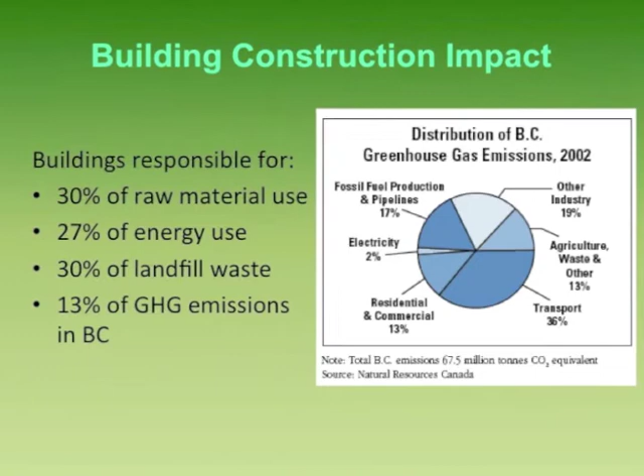So what's the impact of building on the environment? Buildings actually do have a huge impact. The guy from the city was saying that he was finding the biggest demand in energy was for their existing buildings. So 30% of raw materials go into buildings, 27% of energy use, 30% of landfill. Now, when there's a boom, that actually goes up in numbers, and that's including all new construction and renovations, and 13% of greenhouse gas emissions in BC. So it's a pretty huge impact.

So what is green building? Well, it's part of a solution. There are lots of different ideas to try to address the problems of greenhouse gas and global warming, but certainly farming is one, and I'm involved with that issue also. So to create a green building, we select durable materials, and the first thing I put up there is wood, because it's my favorite material to work with, being a carpenter, but there are other solutions out there, and cedar is one of the best ones.

We also have to consider the embodied energy in the building. This comes right from where the materials come from, the transportation of those materials to the site, and how those materials are used on site. So there's a life cycle of a material. I liked the presentation from that young man who was talking about reusing existing wood that would be thrown away.

One big principle of green building is to reduce thermal bridging. I teach building science, so what is thermal bridging? Basically, it's the transfer of heat through a wall from studs. This is a thermal image you would take with a thermal camera, and it's showing where the heat loss is in a house. So basically where all the studs are is where you lose some of your heat. Of course, most of the heat is lost through windows, but this gives you an idea of where the heat loss is in the house.

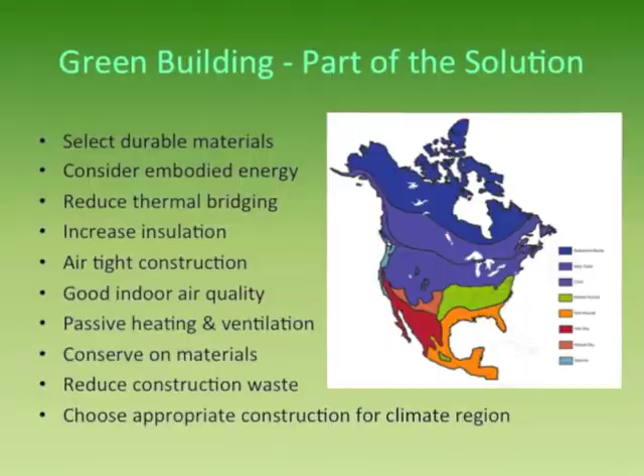But Vancouver Island actually shares two hygrothermal regions in North America. So we're actually a part of a marine climate and a cold climate similar to what's in central United States. But our building codes throughout the rest of Canada are for a very cold building climate. We share the same uniform building codes across Canada, so we end up with some issues with that. So we try to create regional requirements for our building codes.

And one of those is vapor barriers and ventilation. The rain screen was one of those issues. So the big point here is to design a house and build a house that's appropriate for your region. So I don't want to make too long a presentation here.

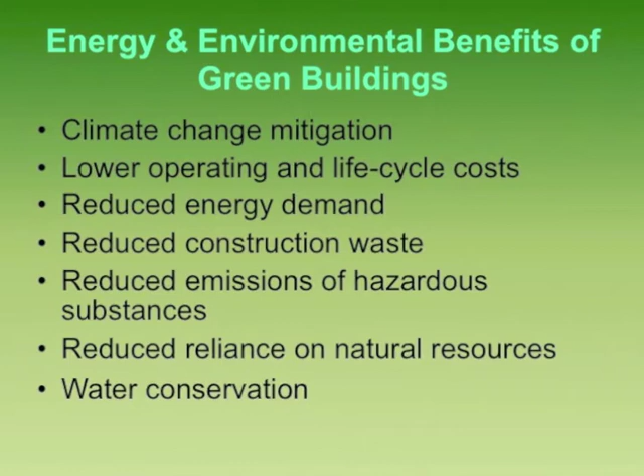The advantages of green building would be to mitigate climate change, to lower operating and life cycle costs, to reduce energy demand, reduce construction waste, reduce emissions of hazardous substances, reduce reliance on natural resources, and water conservation. This is all possible. This is being done, and there are a lot of ways of doing it.

A good example: CMHC sponsored a program called the Equilibrium Program, at the bottom of the screen there. And this example here is in Edmonton, Alberta. I like this example because this contractor is one of the best contractors, in my opinion, in Canada for building net zero buildings. What is a net zero building? Basically a building that

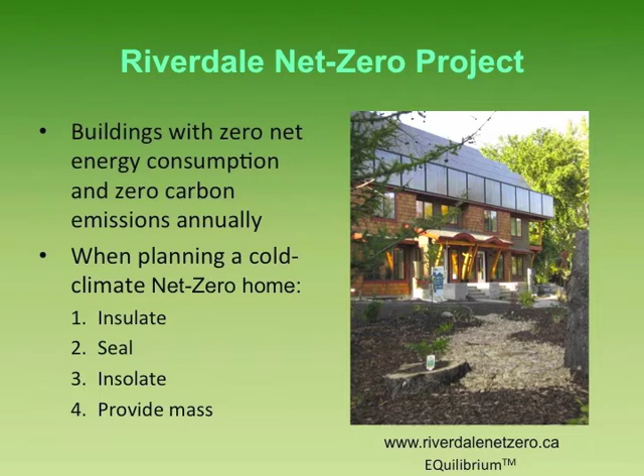has net zero energy consumption, and it does that by actually creating energy with photovoltaic systems. Also, with consideration of all the materials, you consider the carbon emissions annually, and that should be net zero too. And how we do that in a cold climate is we increase the insulation, we seal it, make it airtight, and we insolate, which means thermal design for solar thermal, and provide thermal mass.

So in this example here, why I like this one is that it shows you the actual dollars and cents. I get this kind of question all the time: how much does it cost? Is it going to increase the cost of my construction quite a lot? Well, I usually have a set answer: maybe about $5,000 or $6,000. Most people are pretty shocked that in a new construction it could come that cheap.

So basically, it's just a different philosophy in construction. We're looking at increasing the wall thickness and adding a little bit more insulation. So in this example of the net zero home, it actually cost $109,000 to achieve net zero energy. That was to provide the photovoltaics and the hot water heating system, but only $18,000 of that $109,000 actually created 85% of that energy conservation.

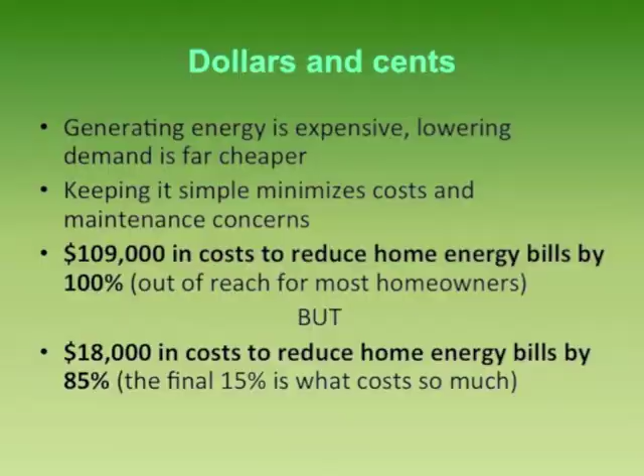So let's break it down and look at what happened. Out of the $18,000, we're looking at better insulation, windows, heating systems that are more efficient, appliances, and passive solar design, for a total of $18,000. So we got the impact of 85%. Then we look at solar hot water heating systems. They would have evacuated tube type systems on your roof. Those systems for this project were $37,000, and achieved 10% of that goal.

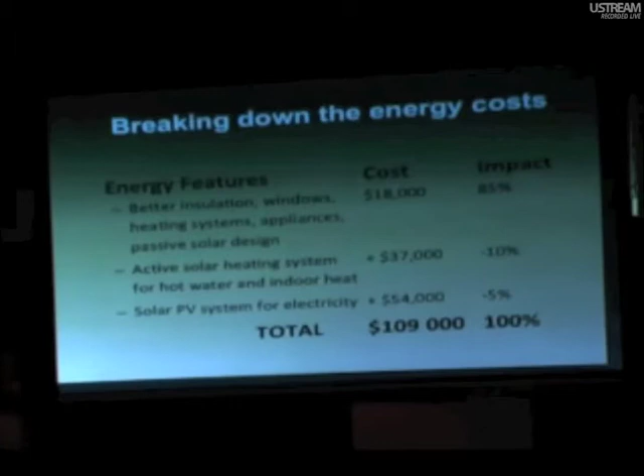Then we look at photovoltaic systems to actually bring that to 100% net zero energy, and the cost of that system was $54,000, and it only achieved 5% of the goal. So there's your numbers. So what you need to look at is what you would do if you were going to invest in a new construction and get your best buck.

The Germans are actually really good at this. They have developed a system called Passive House. And what we've got here is an example of a double wall system. The contrast is not too good, but basically it's two independent 2x4 walls. I've built hundreds of houses like this in the Northwest Territories, and you get about an R44.

Most people's first reaction is, wow, that's overkill. But in Germany, this is how they're building their houses. It's a really good design. It came out of Canada. A Saskatchewan farmer came up with the idea. It's part of the R2000 program. I'm just going to go through a few things really quickly here.

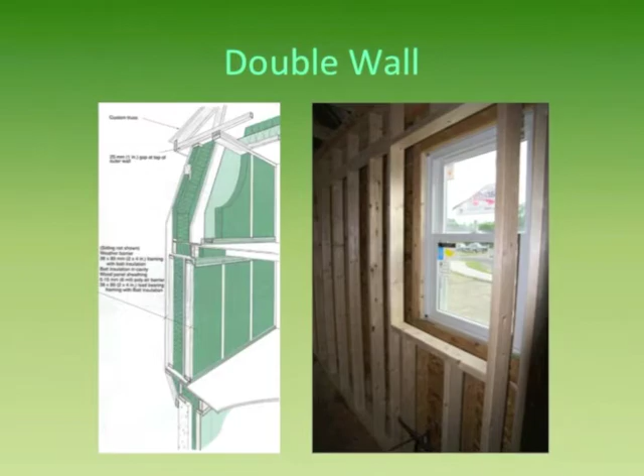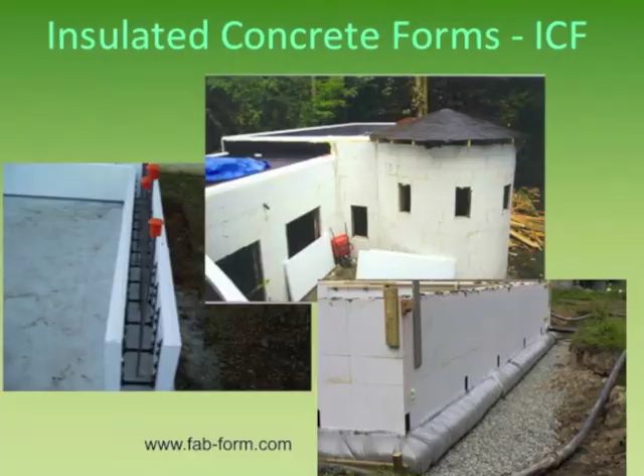Insulated concrete forms are a system that's gaining popularity. Habitat for Humanity adopted this building method a few years ago, so all their buildings are built with this specification. A very highly efficient system, though it uses a lot of styrofoam, which is dependent on oil. I like this system. This is one of my favorite ones: Durisol. It's made in Canada, in Ontario.

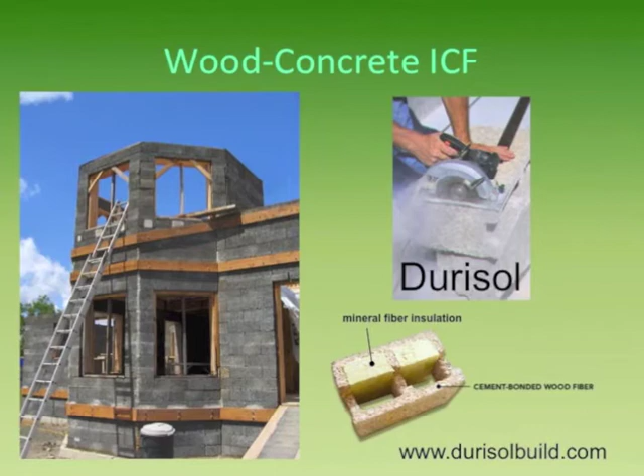It's basically a fiber cement product. You take waste products from mills, really good use of pine beetle wood, mix it with cement, and you make a block. And R-value of this block would be about R30. What's beautiful about this is you pour concrete in it, and then you have thermal mass in your walls. A very, very energy efficient system. Can be cut with a saw, so it's very versatile.

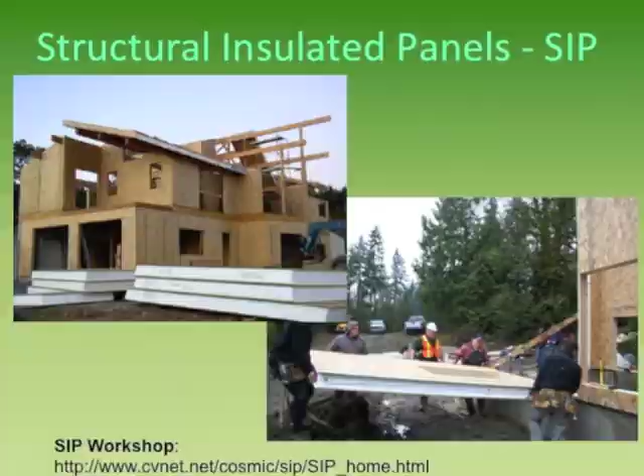Structural insulated panels is another system that hasn't really quite caught on, but there's a few good contractors on the island, and I have a few links there. But what I'll do is give you a link at the website at the end of the presentation to write down, and you can get all this information. One thing I don't like about this is basically the indoor air quality of these buildings. It's a super airtight building, and you're basically living in a styrofoam cup. So there's lots of off-gassing from the plastics and the plywoods and the formaldehydes, and I just don't think that the air quality in these buildings is good.

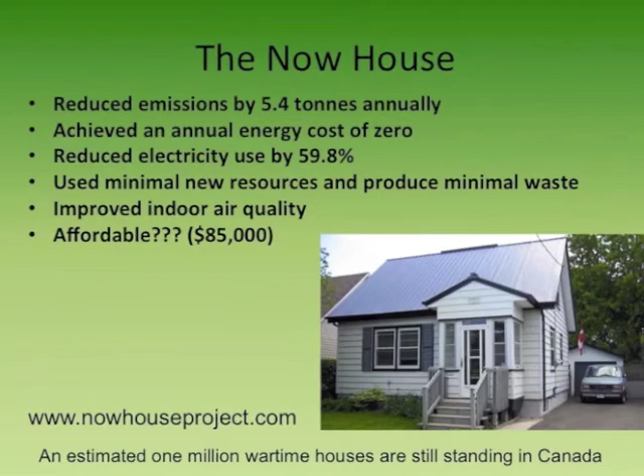This is something I came across in my research. The Now House is an initiative in Ontario. So this was actually a part of the CMHC Equilibrium project. So it's a retrofit. This was basically a wartime house. Previously, CMHC was called the Wartime Housing Limited, and they built and sponsored close to a million houses like this throughout Canada. So we have houses like this in our town. They were built pretty quickly to accommodate workers in the wartime. So they're typically 2x4 walls with little or no insulation. And so this is a huge challenge for Canada. All these houses exist, and they're consuming a lot of energy.

And so this example here is that they retrofitted this house to net zero. And so they actually reduced their emissions by 5.4 tons. They achieved net zero. So it's all the electricity. It's all looking pretty good, except affordability. So again, when you add the solar water heating systems and photovoltaic systems, that's what's adding to the cost.

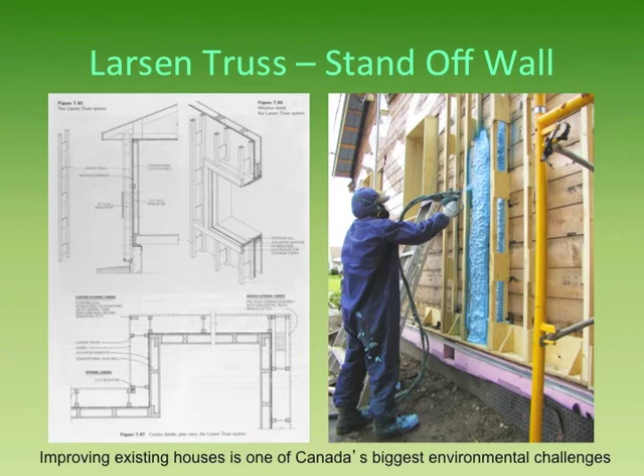If you wanted just to basically retrofit the building, you could do this. This is the standoff wall system. I retrofitted, when I was working for public housing, close to 680 units for public housing using this system. So I know the results. You can actually achieve quite a lot of energy reduction with this system. So it's basically building a truss outside of a wall system. So there's no disruption of the inside space at all, and all the building is done outside. When you do that, you can put new siding, you can put your rain screen, and address all the problems with moisture in our region here. So this is one of the best solutions.

So what I'm proposing here is a community type initiative so that we get together and provide some retrofits for existing buildings here. So we would have to develop a local team to discuss this and set goals for our community. And to try to reduce our energy consumption in these existing buildings by at least 25%. And we can achieve that. I know that. I've actually seen 30% energy reduction in these buildings when we retrofit them.

So we'll explore funding opportunities and bring designers, builders, and I have to tell you that we actually have those people available. I was involved with a group of contractors in Nanaimo, and we actually built a net zero home there. So there's a good example for you to look at if you're interested. But I would like to do that here in Port Alberni, and we'll retrofit one existing building to net zero, or perhaps just retrofit it to get 25%. Right.